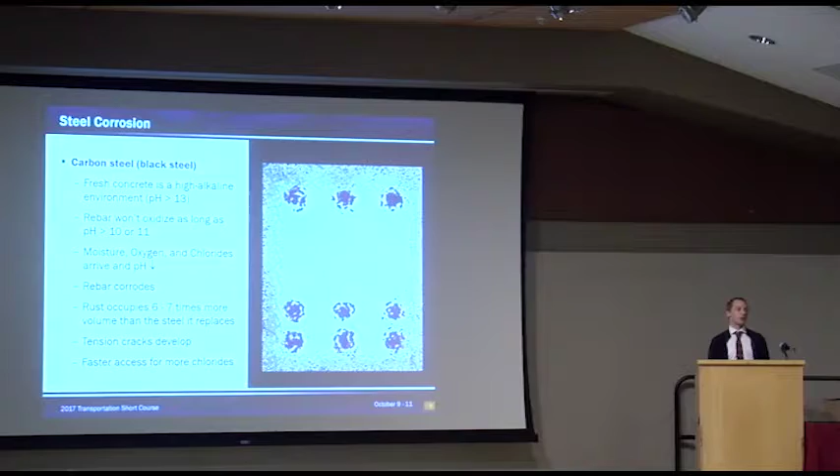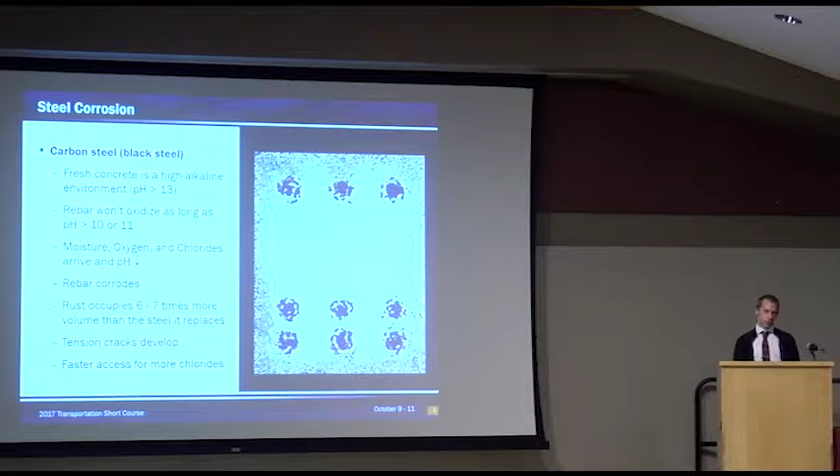What happens is that water, air, and especially chlorides can get through that concrete. They lower the pH, and once it does, steel does corrode. The real problem is when it corrodes, the corroded material begins to take up about 7 times more volume than it used to. So we're basically inflating a bunch of little tiny balloons inside the concrete. This causes tensile stresses and opens up cracks. More chlorides now get to the rebar, and now we're talking about section loss and real capacity issues. So that's what we're dealing with.

So what does TxDOT do about it? Well, these are some bridge recommendations that we have. If you want to take a closer look at these, and I encourage everybody to do so, just Google TxDOT corrosion. It'll be the first thing that comes up.

These are district-wide recommendations in the shaded counties here. Texas is too big to have many recommendations statewide. When it comes to corrosion, it's a different animal in Austin than it is in Amarillo. It really comes down to where it gets cold and where we use de-icing salts. So that's what you're seeing with the shaded counties here.

So what you'll see, TxDOT does a really good job with our concrete, and that's our first line of defense against corrosion. The first thing we do is bump up the clear cover. Now, these recommendations were issued in 2013. Since that time, we've actually decided to go with 2.5-inch clear cover over the top mat of reinforcing in all of our bridge decks.

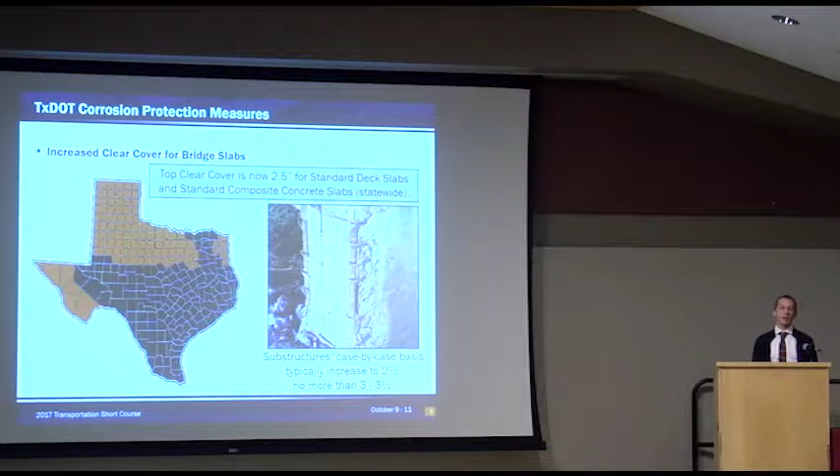But the substructure also needs attention a lot of the time, and in a highly corrosive environment, we say go ahead, case-by-case basis, if you need to, bump that clear cover up to 3 inches, maybe 3 or 3.5, but too much more than that and we're talking about unreinforced concrete, and that's a whole other problem.

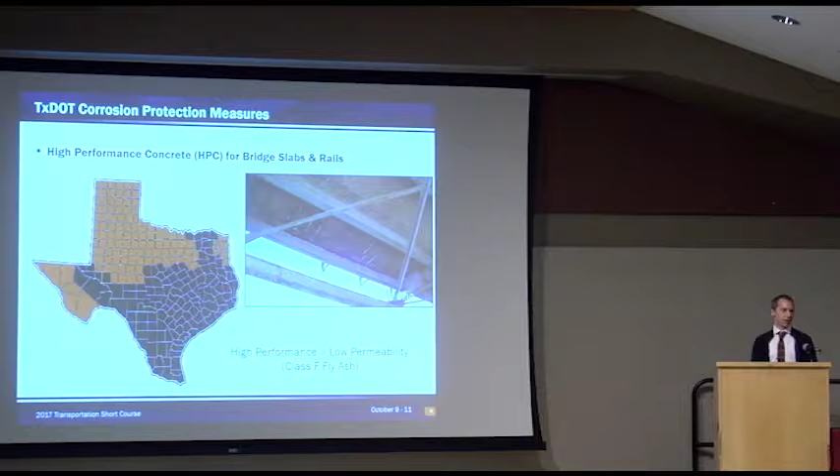Other thing we do is high-performance concrete. We produce a lot of Class F fly ash in this state, and this is a good place to put it. When I say high-performance concrete, that really just means low permeability concrete. And the idea is just like clear cover: we're slowing down the migration of these chlorides.

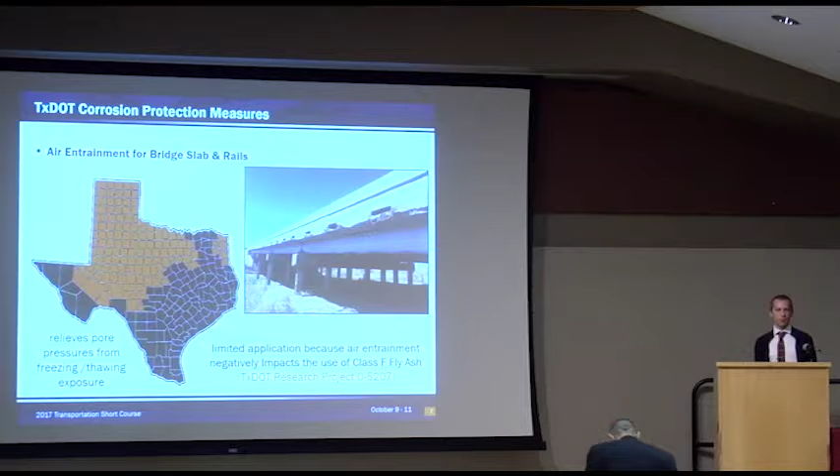Another thing we do is air entrainment. We all know about freeze and thaw cycles in the northern part of the state. Air entrainment helps us avoid cracking from those stresses, because cracking would allow chlorides to come in faster. One thing I'll mention is that we do like our Class F fly ash, and we like air entrainment, but Class F fly ash and air entrainment don't get along together. When Class F is in the mix, it becomes kind of difficult to hit our target air content. So we don't specify air entrainment statewide; we limit that to the northern parts of the state where we really need it.

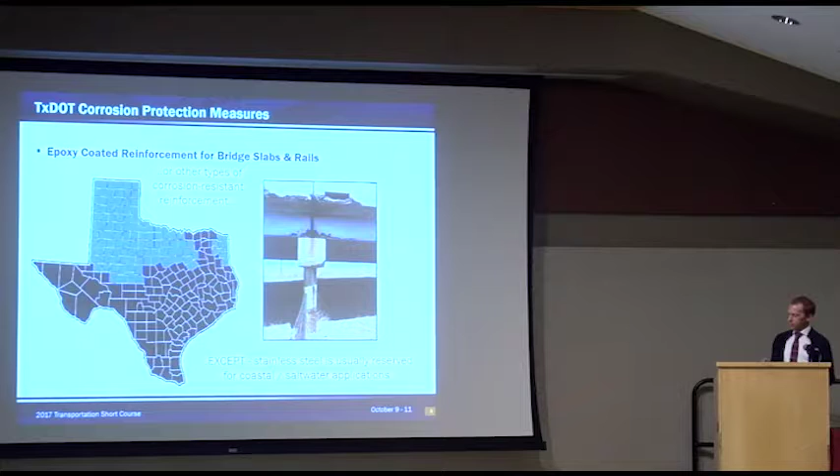So it's not the only one. We say that the corrosion measure is to use epoxy coated reinforcing steel. The measure was written in 2013, and at this point I can say if we say use epoxy coated reinforcement, use any of these materials. I'm going to talk about a few of them today, and a little bit in terms of performance and cost.

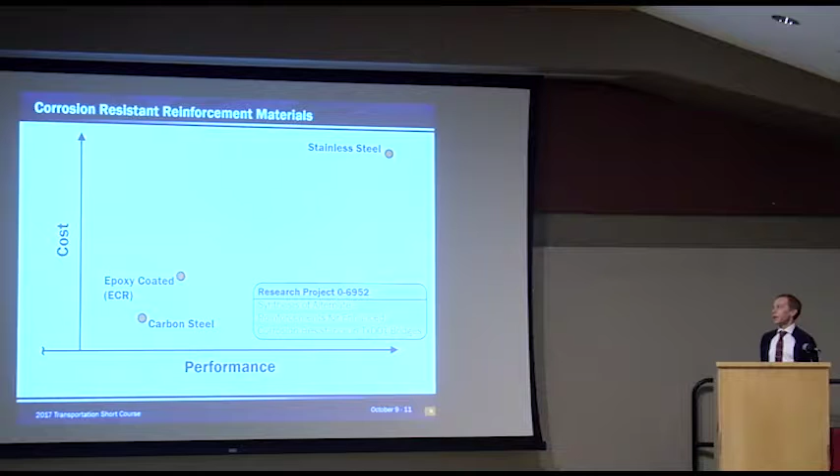So carbon steel, or regular steel, is the cheapest and has the most trouble with corrosion. Epoxy coated is a little bit more expensive and performs a little bit better. Higher end of the scale, we've got stainless steel. In between, we've got today's presentation: galvanized rebar, glass fiber reinforced polymer, dual coated, and even low carbon chromium steel.

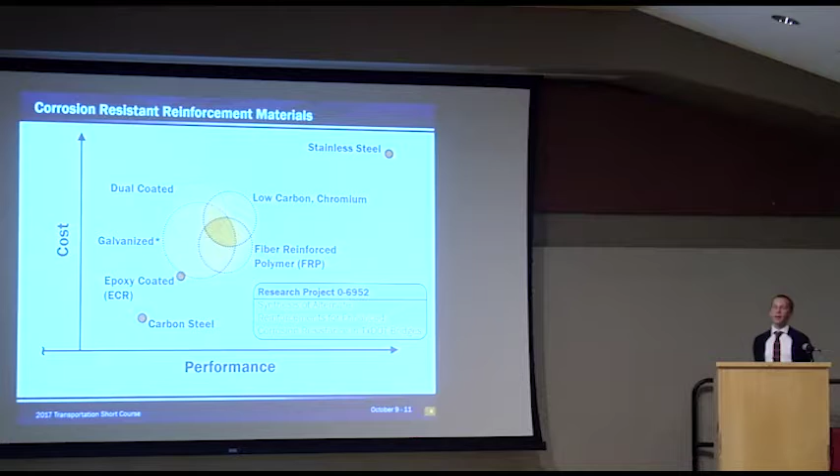I'm not going to get up here and tell you which one is the best performing or the least expensive. There's a research project listed up here, and I encourage everybody to follow that project if you're interested in those questions, because that's where they're going to be answered. But now let's just take a look at these one by one.

Epoxy coated. Again, we all kind of know what this is. What I'll point out is the coating thickness is 7 to 12 mils, mils being milli-inch. If you've seen it in the field, I've always seen it green. We have two different ASTMs we can specify it by. If you see green epoxy coated rebar, that means it was done by a process that allows it to be fabricated after it's coated. If you see somebody bending a green bar, it's okay.

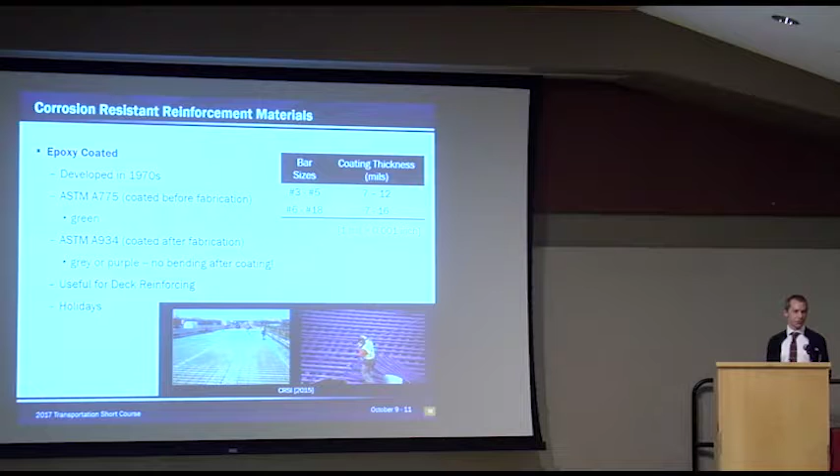Purple epoxy coated rebar is a different kind of coating, and after it's coated, it can't be fabricated. So if somebody's bending a purple bar, or a gray one, same thing, that's a bad thing. The holidays with epoxy coated reinforcement, you've probably heard of that. Holidays are little holes that you can't see with your naked eye, but the chlorides, the water, they can find it. And if the holes are there, the rebar underneath them is not safe.

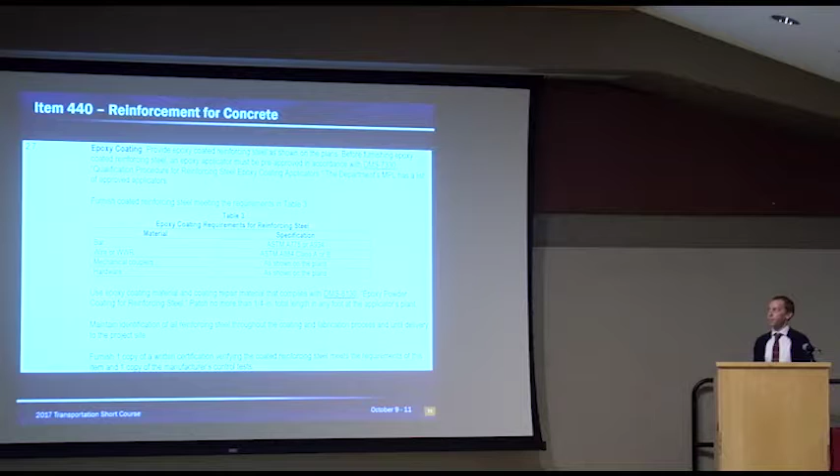Epoxy coating, all these that we're going to talk about today, they're in item 440. I'm not going to go through this line by line. I just want you to know that it's there.

Now, hot dip galvanized reinforcement. Hot dip galvanizing is basically dipping metal into a bath of molten zinc, and the zinc helps the material fight corrosion.

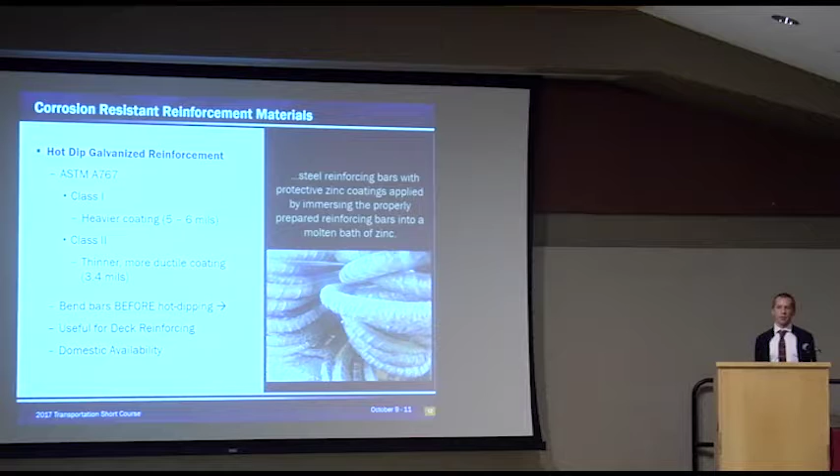There's two classes of hot dip galvanizing for reinforcement, Class 1 and Class 2 listed up here. The thicker one is Class 1, and you might think the thicker coating is going to be the stronger coating. But if you fabricate the bar after you've hot dipped it, and you're using that thicker coating, it might look something like this picture here. I don't know if y'all can see the detail from the back, but there's a lot of chipping in that galvanized coating, and that's kind of defeating the purpose here.

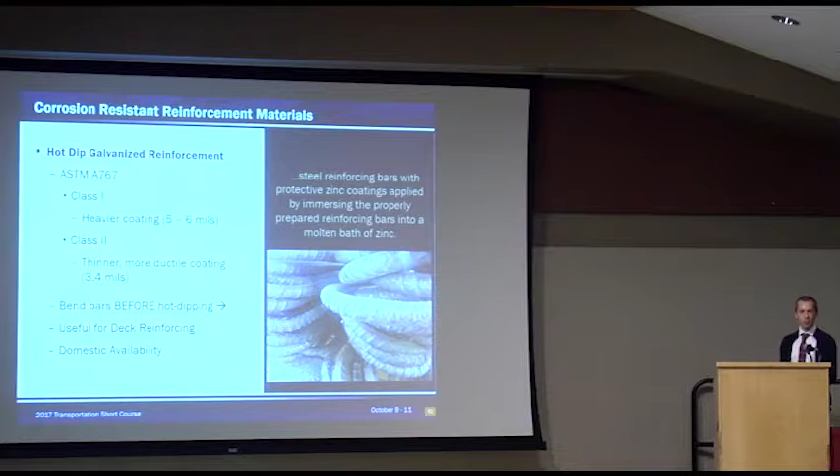So the takeaway here is that hot dip galvanized reinforcement is going to perform better if you fabricate it before you dip it. You can use Class 2 to get a more ductile coating, but I would still say let's fabricate this stuff before we use hot dip. It's in item 440 again.

But there's another kind of hot dip galvanizing now, continuous. So instead of just immersing in a bath of molten zinc, now we're passing it through, and we're adding aluminum to that bath. What that means is that the zinc is going to better adhere to the metal, to the rebar. We can get down to a 2 mil coating, very thin.

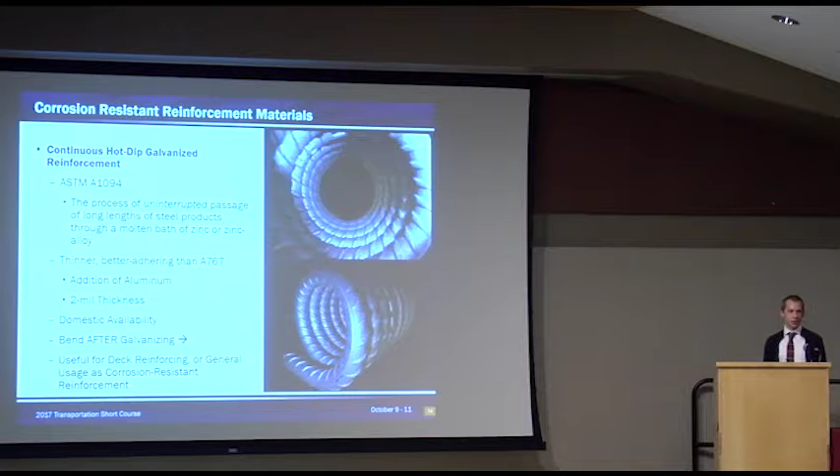This shown here was continuously hot dipped as a straight bar and then fabricated into this tight spiral, and there's no flaking here. This has the potential to be a very good product. But it's new. We don't know that much about cost and performance yet, and it's not in item 440 yet. But keep an eye on the special provisions, because we've got our eyes on this, and I think it's coming.

So we've talked about epoxy coated, galvanized. Dual coated is just both, so it's the one we just talked about, continuous hot dip galvanized bar that's then epoxy coated. And the epoxy for these guys is yellow.

And now it's just like you'd expect. It's belt and suspenders, probably going to have a higher performance level, and probably a little more expensive. But this is one of the materials that's specified by an ASTM, yet is only produced by one manufacturer, and right now it does not seem to be available from that manufacturer. So if you'd like to use this, just a word to the wise: check the availability first.

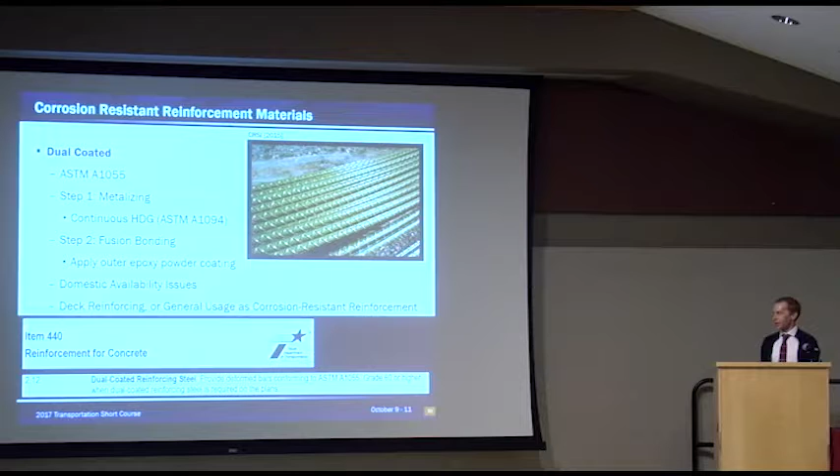As shown down here, this is in item 440. Now let's change gears a little bit. Everything up to now that I've talked about has been regular carbon steel with some kind of jacket or coating around it.

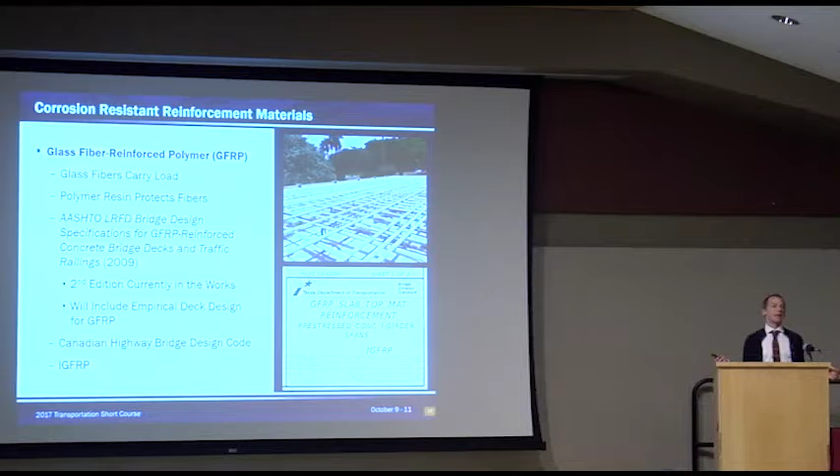Glass fiber reinforced polymer is not steel. There's no steel in it. It's just glass fibers surrounded by a resin, a polymer resin material. So the glass fibers are carrying tension, and the polymer material is just protecting the glass fibers.

The design and material specifications for glass fiber reinforced polymer are all available in an AASHTO guideline specifically for GFRP. We're still on the first edition. It's about 8 years old now. The second edition is being worked on. I would imagine we'll see it in a year or two.

Big thing about the second edition: TxDOT likes the empirical deck procedure for our rebar. Right now that does not apply to GFRP, but in the second edition it will. So that's going to help us implement this material, I think.

We already have the standard out, IGFRP. So if you're interested in using this material, and we'd like you to be interested in using this material, take a look at this. This is for TxDOT girder bridges, standard bridges. It'll give you a detail to throw some IGFRP in that slab.

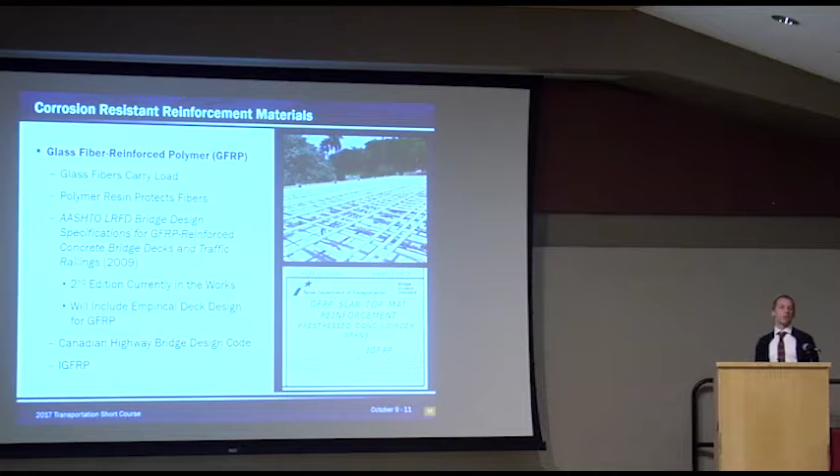And I'll mention the Canadians use more de-icing salts than we do, and they have a lot more experience with this particular material. We've learned a lot from them. We've looked at a lot of their research.

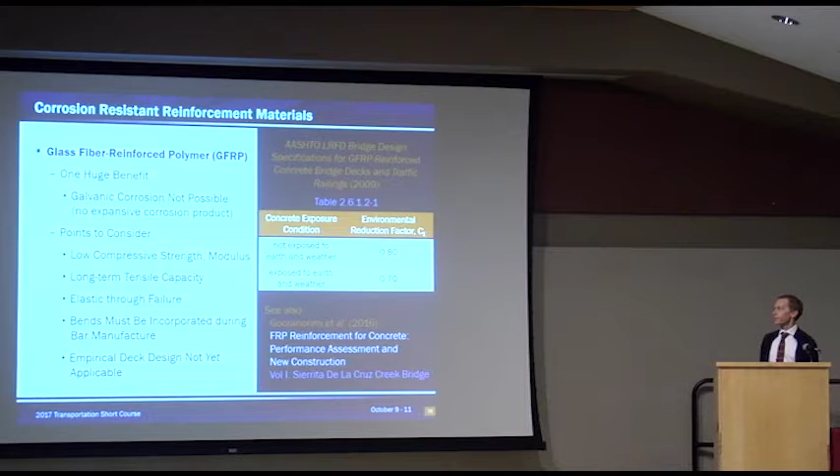Only other thing I want to mention here: you cannot fabricate this material. Bends have to be incorporated into the manufacturing process. And running low on time, so again, it's in item 440.

I want to mention low carbon chromium steel. The deal here is that this is not a coating, this is a different kind of metal. Some of the carbon has been replaced with chromium. That's expensive, but the more chromium you have in your steel, the better it can fight corrosion. So this only comes in high strength, 100 or 120 KSI. We only allow 100 KSI.

There are 3 alloys to know about. We only allow the highest chromium content alloy. However, the other 2 probably are okay, maybe okay—we just haven't tested them yet.

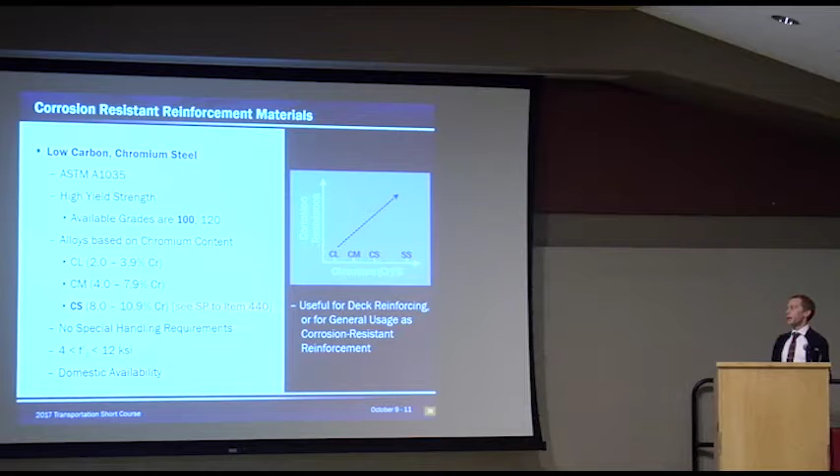No special handling requirements because there's no coating that can get messed up, so there's some nice things about this. It's another one that's only available from one manufacturer, even though we just specify it by the ASTM. It's in item 440, but you also need to look at the special provision to item 440—that's where some of the additional details come in.

Which takes us to the Rolls-Royce of reinforcement, stainless steel. This is just an extension of low carbon chromium steel in a sense, because we're just adding more chromium. Low carbon chromium steel, we were up to about 10%. Here we're talking about 15 to 25% chromium.

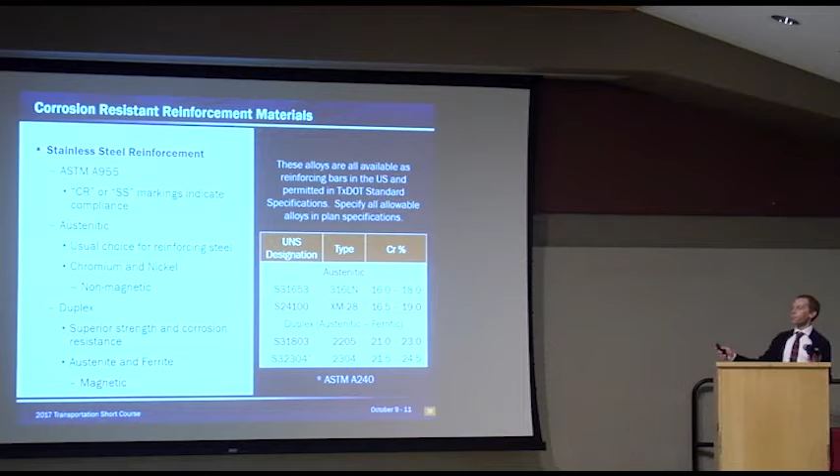There are 2 classes, austenitic and duplex. Big takeaway is austenitic is not magnetic; duplex has a magnetic field associated with it. So if we're talking about somewhere near a toll road or somewhere with electronic scanning, we probably want to stick with austenitic. This table here divides what we allow into austenitic and duplex classes and lists the chromium content.

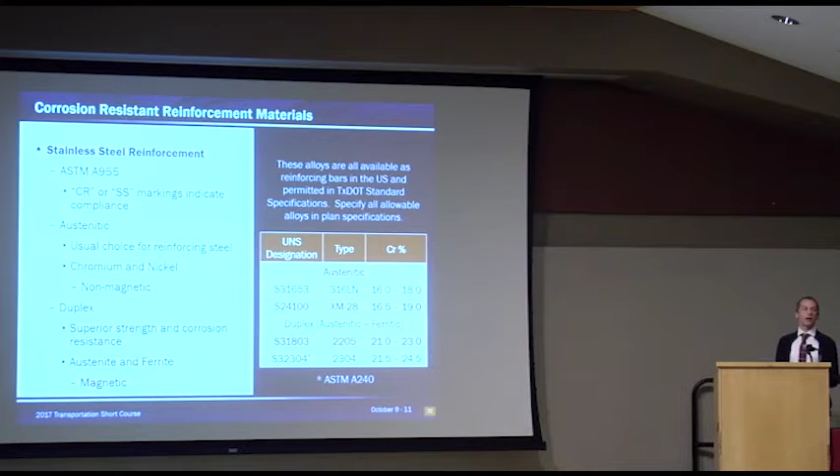This will give you an idea of what to specify, and be sure to list exactly what you want in your contract documents, because these things all have different price tags. And I'll just mention, stainless is available as a cladding for carbon steel. That's not what we do at TxDOT. If we're going to spend this kind of money on rebar, we want the real thing, so we're going to get solid bar.